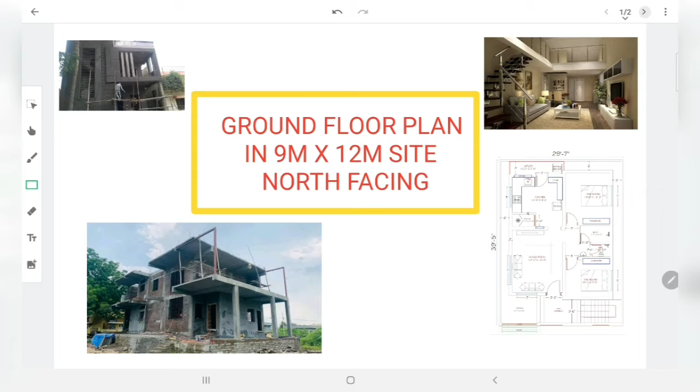Mainly this plan is comprised of 2 bedrooms. Here we have taken 2 bedrooms, 1 living room, and another kitchen room, 1 bath, 1 WC which is separately provided, 1 puja room, and parking. So this much amount of elements we have fixed in the site of 9 meter by 12 meter. This is 9 meter and this is 12 meter. When you convert 9 meter into feet, it will be 29 feet 7 inch, and in the longer direction it will be 39 feet 5 inch. These many elements we have provided.

Here, when you prepare a plan, we must have proper offset given. Here we have taken a compound of thickness 5 inch, that is 1 brick thickness, along with pillars provided in common. Apart from that, we kept an offset of 2 feet on either side, on all sides, a 2 feet offset. Whenever you construct, there should be offset for ventilation purpose, for light and ventilation. Mainly these are provided because on the periphery of this building we will be providing windows to the specific rooms. Here in this drawing we have provided 1 staircase in the front.

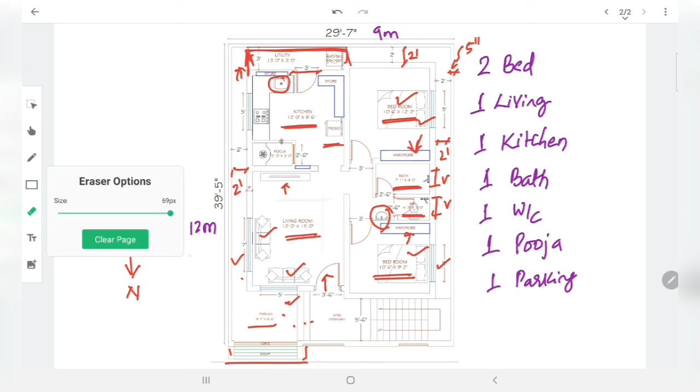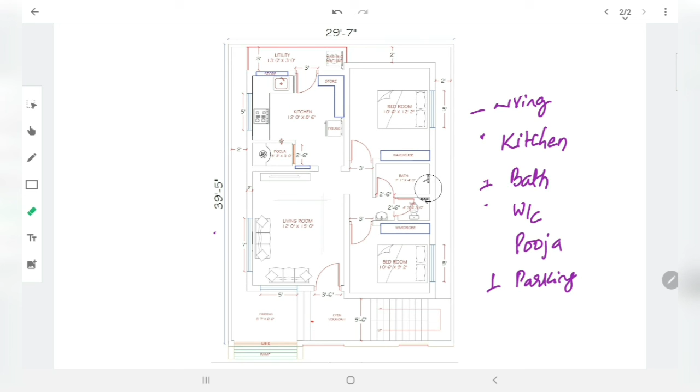So in this way we will be doing the detailed drawing. One must show the detailed drawing before showing to the client. Before finalizing the drawing, it must be very clear, with the dimensions, so one can easily read the drawing. Somebody who is not at all related to the engineering field should be able to read the drawing and understand. That is the most important. You need to mention all the details here. So in this way we will be preparing the working drawing.

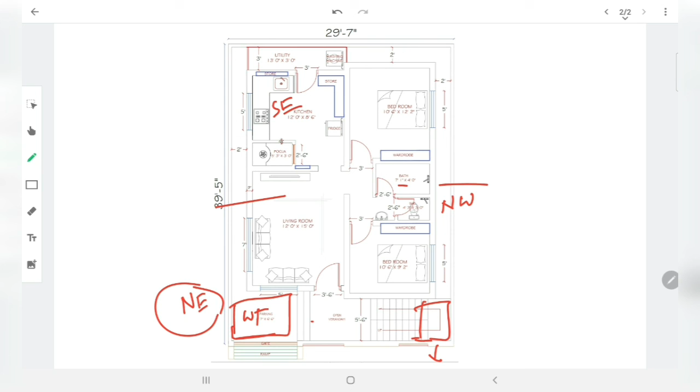So these are all as per Vastu. That means the kitchen is in the southeast corner. These are in the northwest direction, and free space is kept for northeast. So here we will be getting the bore and water tank, an underground water tank to be provided here. If you don't have any drainage facility, you can go for the septic tank outside. In this way, if the client has the requirement of Vastu, you need to provide the drawings in that manner.